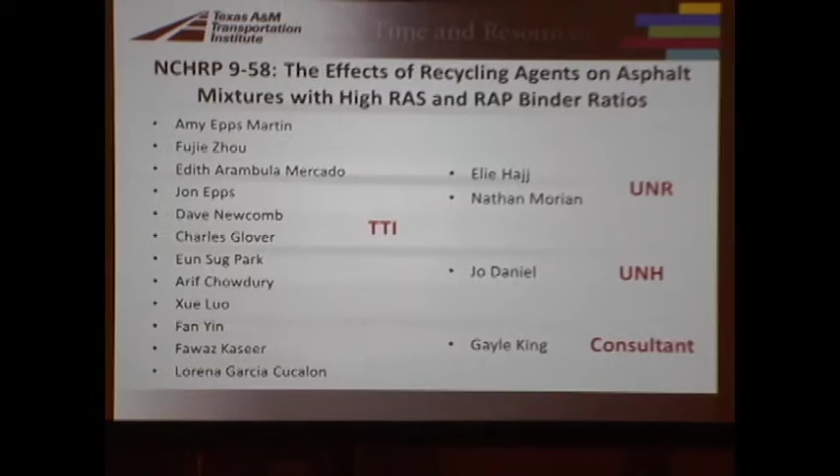The presentation today is just a small part of a big national project we're working on. It's an NCHRP project about the effects of recycling agents on asphalt mixtures with high RAS and RAP binder ratios. There's a lot of people working on this project, and I just try to herd the cats a little bit. It's a great team. Some members are in the audience, and I appreciate everybody's input.

As we all know, the motivation for increasing the recycled binder ratio, or RBR, is both economic, because we don't have to use as much virgin materials, environmental, because we're recycling materials, and there are some engineering benefits.

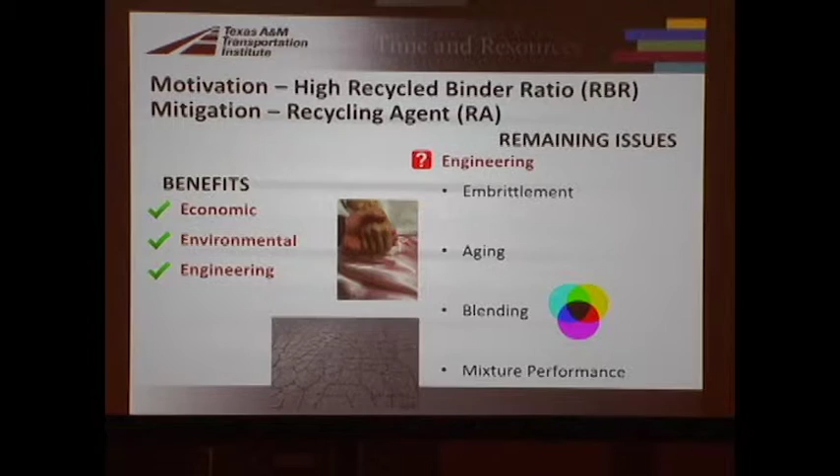But when we get those RBRs up too high, we have some issues, such as the material being too brittle, too stiff. We also don't really know what happens with these mixtures with respect to aging. There's also a big challenge in terms of the blending - what is the actual blending occurring between the virgin binder, the recycled binder from the RAP and the RAS, and if we add in any recycling agents? And then finally, the mixture performance, especially with respect to cracking - that's what we're worried about, because we have these stiff, brittle mixes with high RBRs.

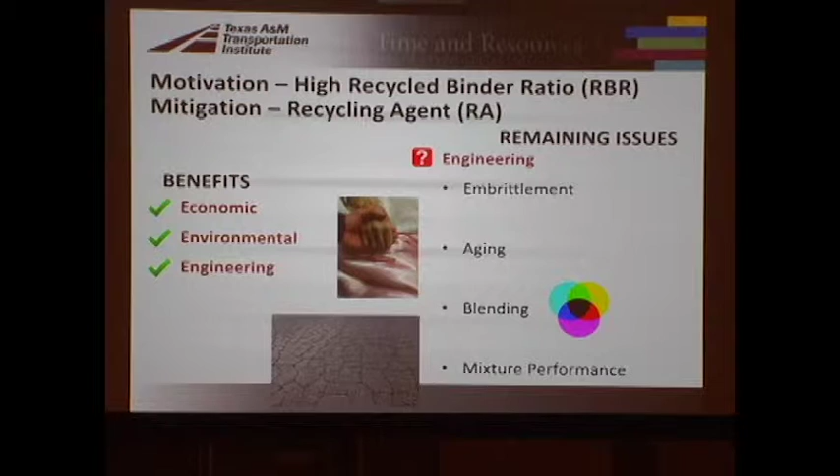So the idea is, let's try to use higher RAP and RAS contents, but use a recycling agent to mitigate those stiffening and embrittlement effects.

This is our latest field project that we just worked on with Wisconsin. Currently in Wisconsin, they're allowing a 0.22 RBR with all RAP, and they put down a mix with what we call the DOT control mix. We're trying to see, can we go up to 0.31 RBR by using a recycling agent? When we do that, our RAP aggregate goes from 26 to 34%.

Our virgin binder goes down from 4.3 to 3.7%. So the idea is, can we get those benefits that we want by using recycling agents to mitigate the effects of stiffening and embrittlement? And do those recycling agent effects last with aging? That's a big thing - maybe they work initially, but do they last with aging?

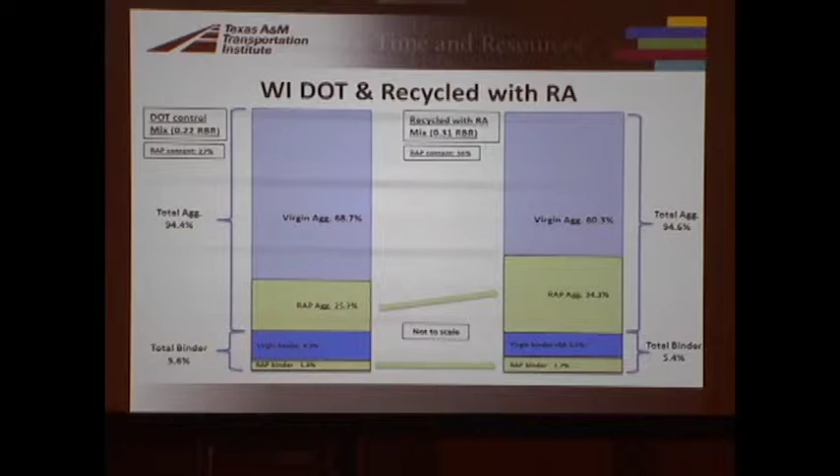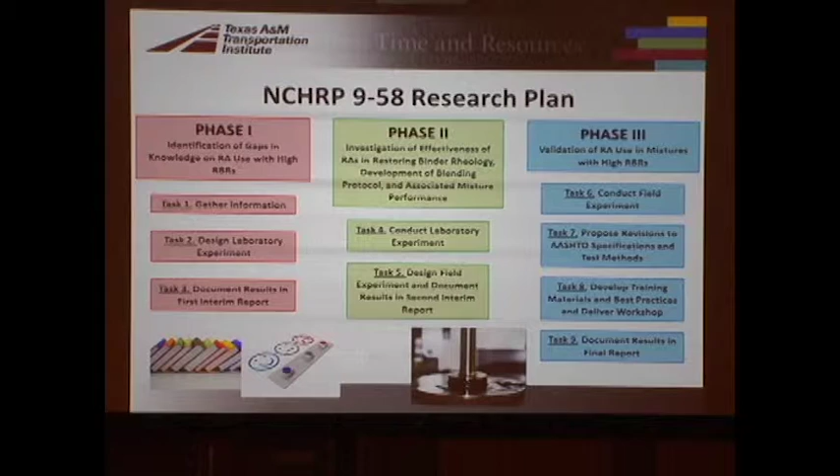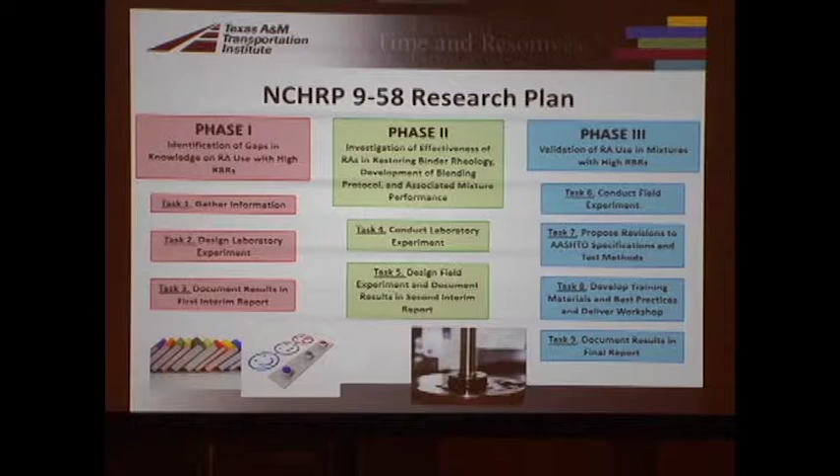To give a sense of where we are in this project, we're currently in phase 2. Phase 1 was a literature review and a survey of DOTs. Phase 2 is where we are right now - it's a big lab experiment, but all of our lab materials are tied to field projects. Then in phase 3, we're going to apply some of the tools we've come up with to lots of different material combinations in the different field projects. I'll speak about that at the end.

Some of the tests we're utilizing in phase 2 - we're doing quite a bit of binder testing, then a little bit of mortar testing. Mortar testing is a way to not have to extract and recover the binder out of the RAP and the RAS, so you're getting a more realistic blend of materials. For both the binder and mortar testing, we're doing the PG grading using the DSR and the BBR like we normally would.

We're using a parameter that's gained a lot of attention recently called delta Tc. That's the temperature where the stiffness criteria in the BBR is met, minus the temperature where the M-value threshold is met. It's a good indication of embrittlement. You want to use base binders with recycled materials that are S-controlled, so you want a positive delta Tc, but lots of binders we use are M-controlled, so their delta Tcs would be negative values.

We're also frequently using another parameter that's gained recent attention called the Glover-Rowe parameter. It's just a different combination of G star and phase angle - instead of G star over sine delta or G star times sine delta, it's G star times the cosine of delta squared, divided by sine delta. So it's just a different combination of G star and delta that you get out of the DSR. However, it's an intermediate temperature property - it's at 15°C, at a set frequency of 0.005 radians per second.

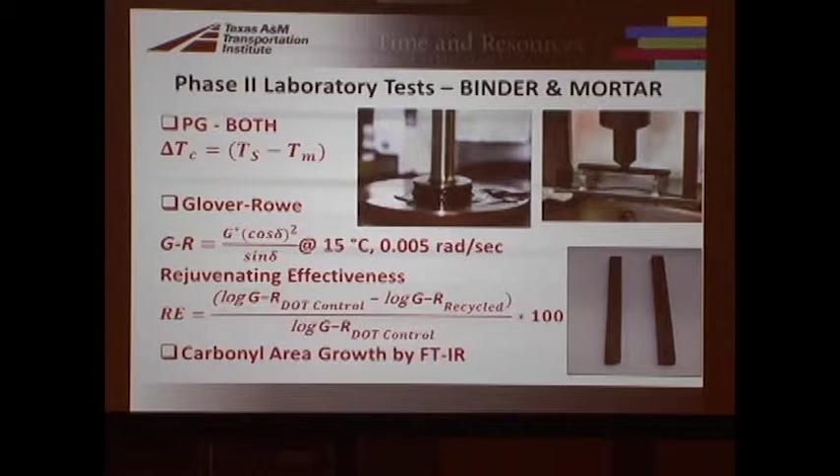We're also, in addition to rheology parameters, looking at chemical parameters, such as oxidation measured according to carbonyl growth by FTIR.

We're also doing mixture tests, so we're doing binder, mortar, and mixture tests. For mixture, we're looking at stiffness in terms of resilient modulus at 25C, because it's easy, cheap, and repeatable. On the same specimens, we're able to run the semicircular bend test and get something called the flexibility index, so we're able to get an intermediate temperature cracking resistance of the mixture.

We're also doing fatigue life by the simplified viscoelastic continuum damage test, and we're also doing the resistance index by the UTSST test. That's an improved TSRST test, which was the thermal stress restrained specimen test. It just has more analysis, and it measures the strain in the specimen that's not restrained also, an unrestrained specimen. So it's just an improved thermal cracking resistance test. We have 2 cracking resistance tests at intermediate temperatures and 1 at low temperatures.

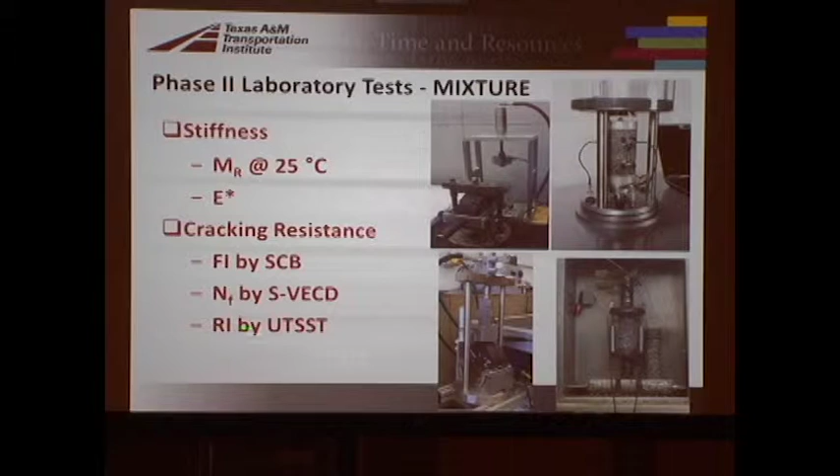So the initial phase 2, before we went to the panel meeting, we looked at a field project constructed in Texas in 2014, where we were lucky that as this project was starting, there was a Texas project being utilized on a TxDOT research project, and it used a 64-22. The target binder was a 70-22, but when they add in RAP and RAS, a lot of times, by the TxDOT specifications, you do a substitute binder and you lower the high temperature grade.

So we have a PG 64-22. We have 0.1 RAP binder ratio and 0.18 RAS binder ratio, and it was manufactured waste type of asphalt shingles. That's important to note, and really we shouldn't combine this and say it's 0.3 RBR. It's really important how much of that is RAP and how much of it is RAS, so we always show both now. We also added in a tall oil, which is kind of the new greener type of recycling agent.

In addition to that, we wanted to expand that for our big laboratory study, so we wanted to look at higher RBRs. We were charged with looking at 0.3 to 0.5 in this project. So we looked at 0.4 RBR with only RAP, and then we decided to look at 0.5 RBR, where we had 0.25 from RAP and 0.25 from RAS. We also looked at tear-off asphalt shingles, as those are more prevalent and much more aged than the manufactured waste shingles.

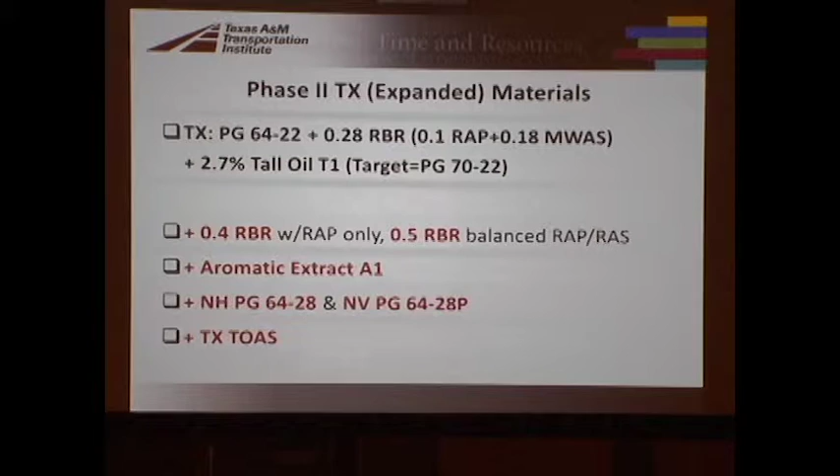We also wanted to look at a second recycling agent, so we looked at one of the older, more traditional types, an aromatic extract that we call A1. We also looked at 2 different binders: a very high quality binder from New Hampshire, unmodified, but a 64-28, which has a very good positive delta TC value compared to the PG 64-22 delta TC value. We also wanted to look at a polymer modified binder, so we looked at a Nevada binder used in another field project associated with 9-58. And I mentioned we're looking at TOAS too, tear-off asphalt shingles.

I don't have time today to talk about everything we're doing in this project, but one thing that might be of interest: to start the whole project, we have to figure out an optimum recycling agent dosage to use in the mixtures, because we cannot test all those mixture properties on multiple recycling agent dosages. So we've been working with the binders, which assumes complete blending, which isn't exactly the realistic scenario in the mixtures, but I'll speak a little about that toward the end.

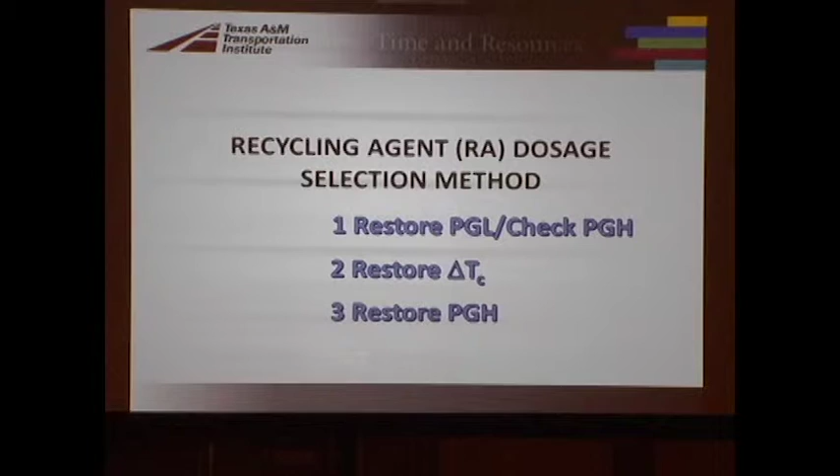So we came up with a preliminary recycling agent dosage selection method, this trial number 1, the first approach we came up with in phase 2. Then in phase 2B, which I'm going to describe in a minute, with some more materials, we came up with these second 2 approaches, and we think we finally nailed it down. So I think this is hopefully of interest.

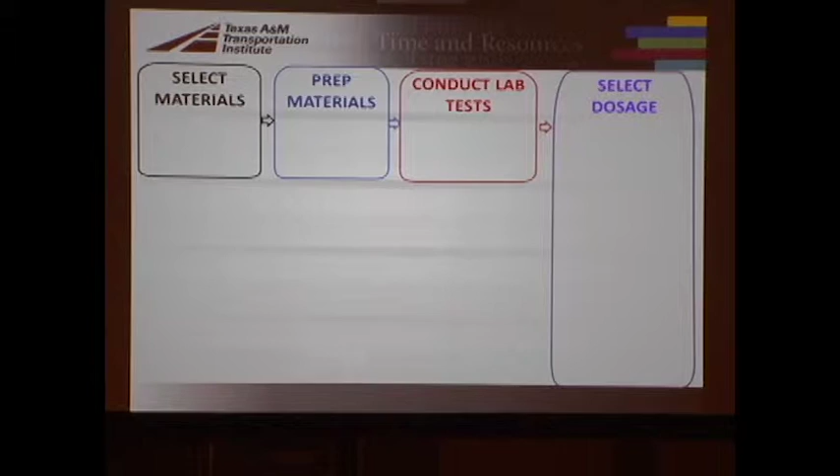So the first one, actually all 3 of them have these steps: select the materials, prep the materials, conduct the laboratory tests, and then those 3 different approaches differ in how we actually select the dosage. All of them have this step: selecting the materials, selecting the target grade, which sometimes can have a bump up due to traffic, and then the base binder grade that might have a bump down due to the use of recycled materials, a substitute binder.

Select your RAP and your RAS sources. We're definitely finding that Texas RAP is way different than New Hampshire RAP in terms of the aging of the materials. Pick your recycling agent. There's lots of different types. Right now I think we've looked at 6 different types, large categories of types, not just different brands.

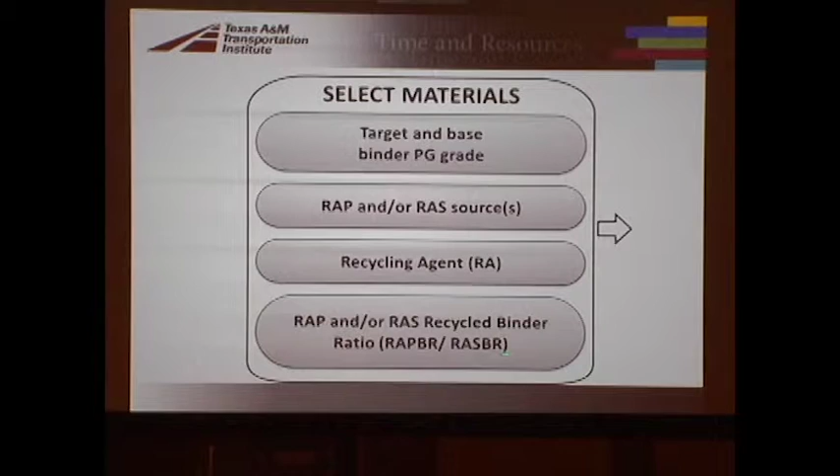And then you got to pick what's your RAP binder ratio and your RAS binder ratio. This is the hard part, extracting and recovering the RAP and the RAS binders. Nobody wants to do that, including my undergrad students. But it's pretty necessary. We're looking into some of the equipment that's coming online that could make it safer and faster and easier. We don't know, we're going to try it out maybe. But you got to get that binder out so that you can add it to the virgin binder and the recycling agents.

So we usually do 3: with no recycling agent, that would be 0% dosage or the control. With a low recycling agent dosage, maybe around 2%, that's kind of in terms of how the manufacturers of the recycling agents recommend what you do. 2% or less, you basically just add it in there. 2 to maybe 5%, you basically take out some virgin binder and replace it with recycling agent. So there's this addition versus replacement in terms of how you add the recycling agent.

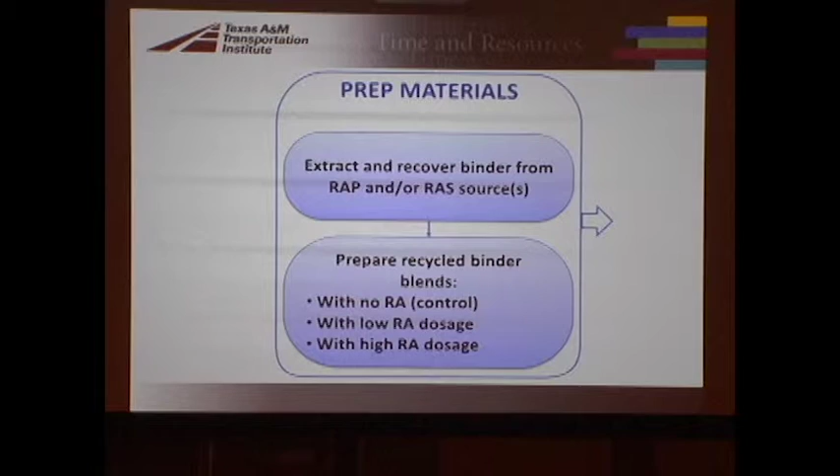So we look at 2% because we thought that was a pretty low dosage, and then we look at 10% because we thought that was pretty high. Well, we thought that was pretty high until we started looking at the material combinations that we used. But even so, we do have to extrapolate a little beyond 10%, but we still feel pretty good about it.

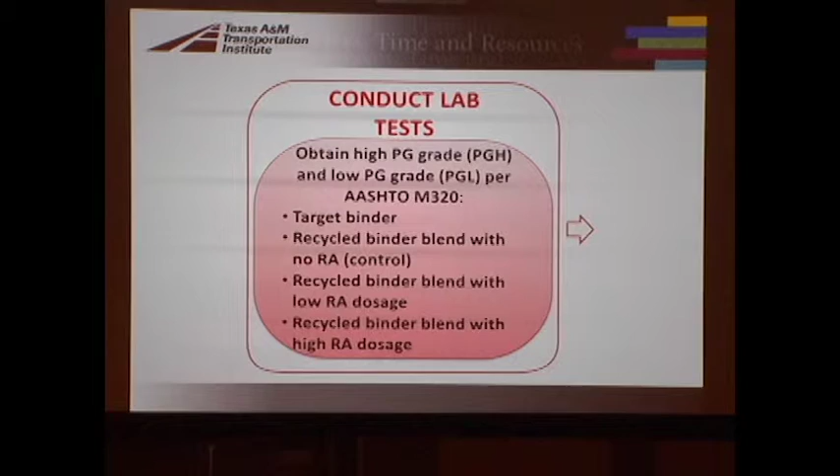Okay, then you got to grade it. So you get the PG high temperature grade, or PGH, and the PG low temperature grade just by AASHTO M320, just like we always do. We do that for the target binder, for the control binder with no recycling agent, and then for the 2 ones with a low and high dosage. And then when you plot these, we basically plot the PG high temperature grade versus the dosage.

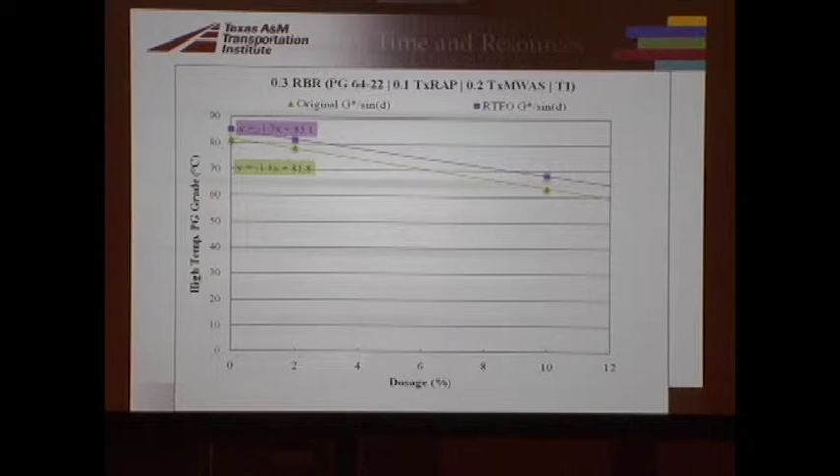We're going to have 3 points: 0%, 2%, and 10%. The green line is the original G-star over sine delta. What was its PG high temperature grade at the threshold? And then the purple is the rolling thin film, because you gotta figure out what both of those are and what's the limiting one.

And then on the right side, we're gonna graph 2 more lines, and we're gonna put the low temperature grade. Here we have the M controlled in blue and the S controlled in gray. What you see here is the distance between these 2 lines is actually the delta TC value. And as we keep adding recycling agent, the distance between those 2 lines is coming together, which is good.

So the way that the first trial of restoring the PG low temperature grade works, what we do is we come along here. So this is controlled by M control, right? The M value is saying it's a minus 15, and the S value is saying it's a minus 26. So it's M controlled when we're over here at 0% dosage.

So we keep adding in dosage along a linear relationship, and everything that we've tested seems to be linear. So we're using a linear relationship, and we feel fine about that. I don't know what would happen if you added 25%, but you're not going to add 25%, so it's okay.

So at these dosage levels, we add it in until we get to a minus 22, okay? Because we started off at a minus 15 or so, we got to add in recycling agent until we get to a minus 22, because our target is 70 minus 22. That's what we're trying to get to, like if we just had virgin binder.

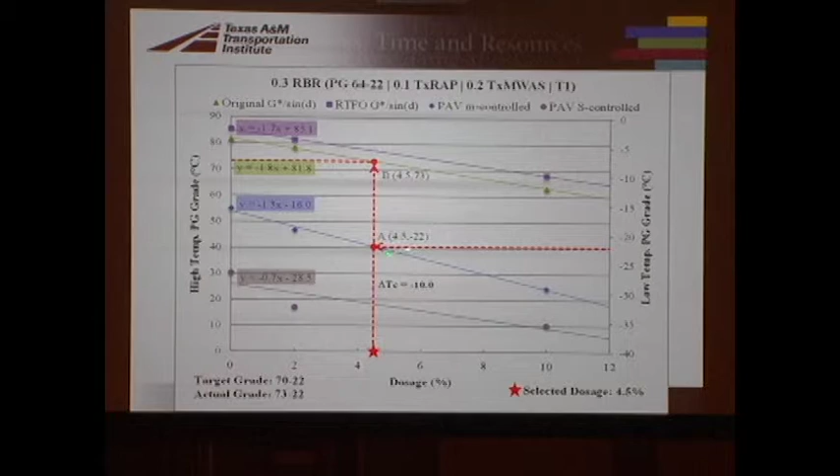So when we get to minus 22, we have a dosage of 4.5%. That sounds reasonable, and we look at what our delta TC value is: minus 10. Then at the next step, since we restore the PG low temperature grade to minus 22, we come up here and just check what is the high temperature grade at that point. So the high temperature grade at the same dosage of 4.5% is 73. So we're at 73 minus 22, which hits the target of 70 minus 22, and we're done.

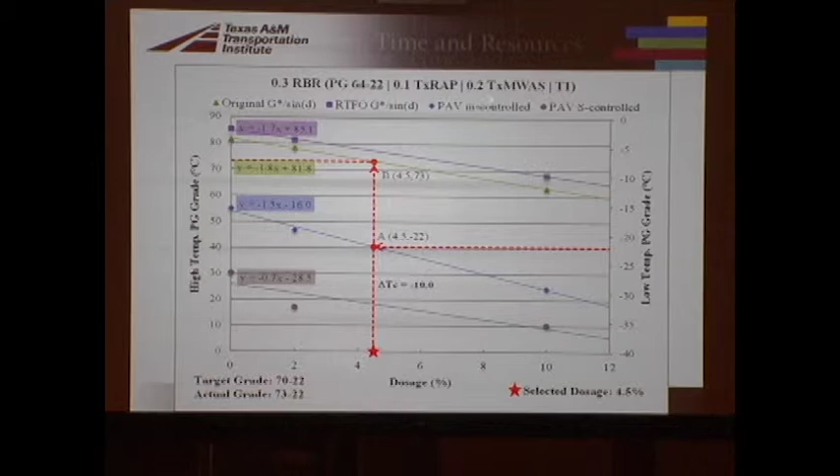Okay, so this is for a particular blend, of course, with a particular mix of RAP and manufactured waste shingles, with a particular base binder and a particular recycling agent. So that's what we just went through in that example, what I just said.

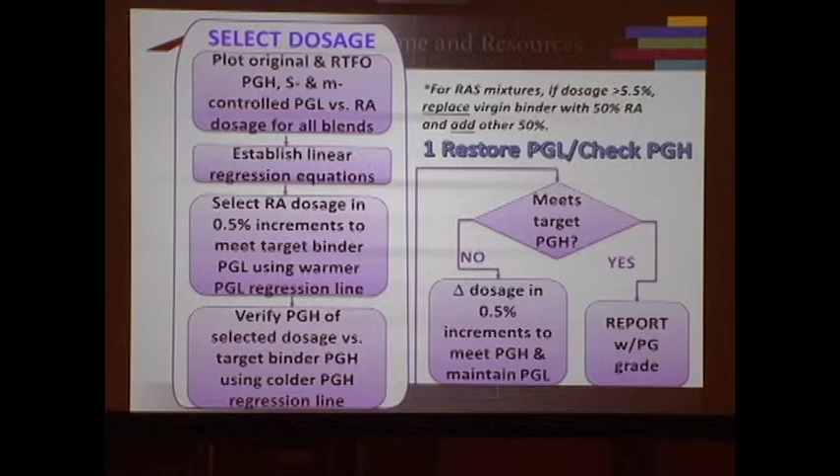So you're using the warmer low temperature grade, which was M controlled, and then you're verifying it using the colder high temperature grade, which was the original binder, not the rolling thin film. That's the first approach that we tried, and we note the PG, or note the delta TC.

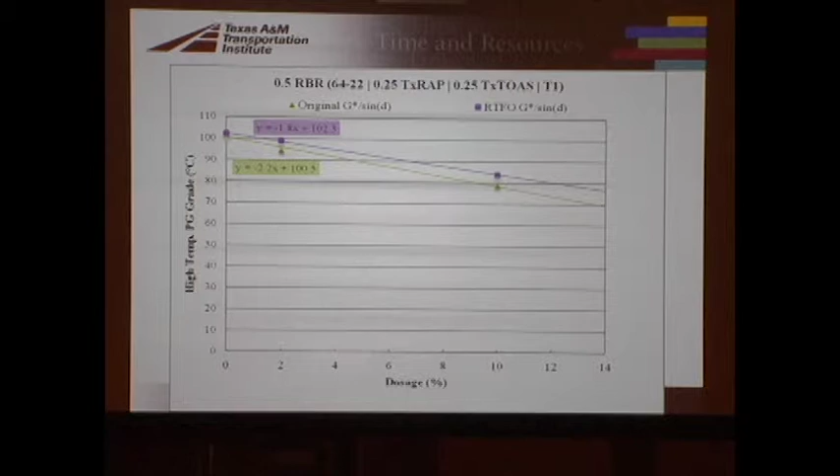Now what if we try it at one of those high RBRs, 0.5 RBR with a really high RAS content, 0.25 RAS content. So we get all four of our lines. You see the crazy M value line, but you do see that it's closing in to the S value line. The delta TC is getting smaller.

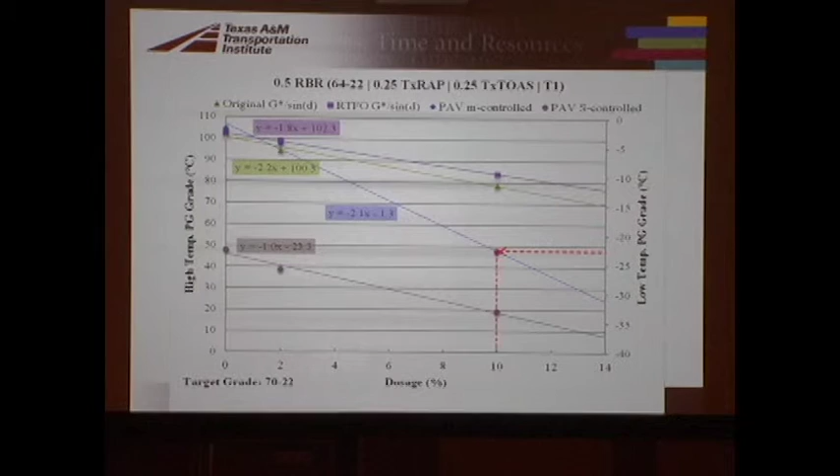So the first thing we do is we come along this very steep blue line and we restore to a minus 22. Once we get to a minus 22, that's at a dosage of 10%, and a delta TC of minus 11, which seems high. Then we check the high temperature grade, and at that point it's a 78. That's not a 70 minus 22, right? That's a 76. So we would do a second step where we'd continue down this line, adding in recycling agent until we bring it down such that it's a 70.

We need to get this number in half, I forgot to mention that, in 0.5% increments. So as a practicality measure, we're doing this in 0.5% increments. We add it in until we at least get below a 76. In this case, we get a 74.

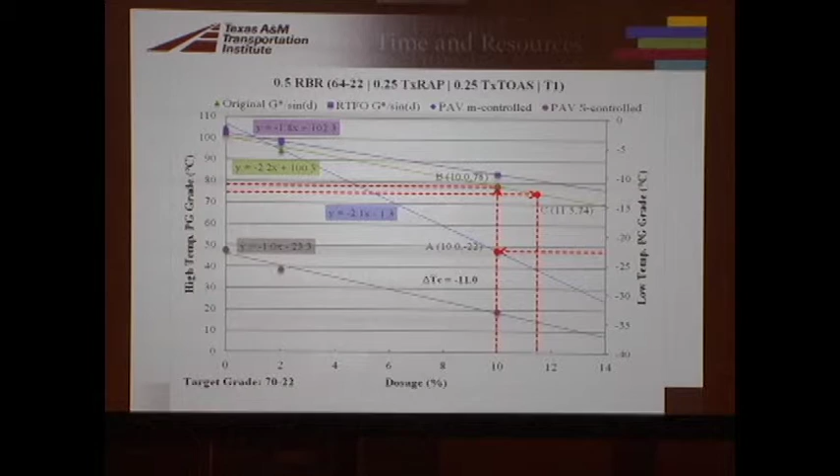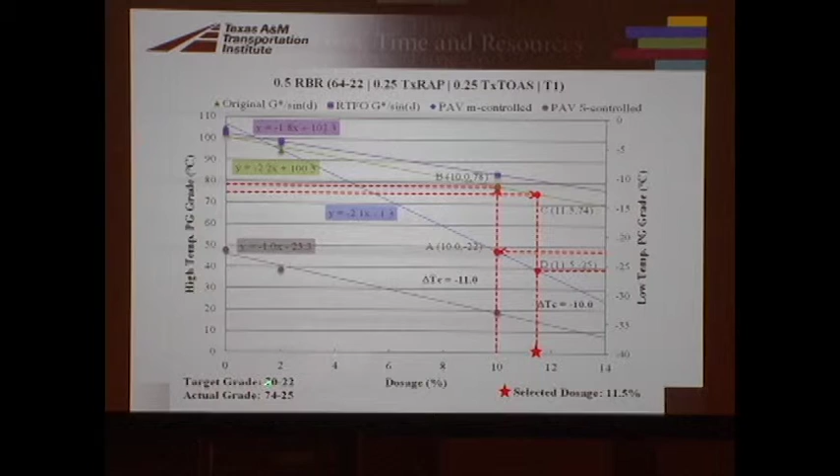And then we just double check. We're at a minus 25, which is still a minus 22 grade. So we get a 74 minus 25 with our new dosage of 11.5%. That meets the target, and it also reduces the delta TC to minus 10.

Now what is the value of this delta TC thing? The delta TC has been shown to be tied to some age-related cracking at airports, and some people have suggested a value of minus 5 is sort of the threshold, you don't want to get more negative than minus 5 after 40 hours of PAV aging. Of course, this is after 20 hours of PAV aging. So 40 hours of PAV aging, it's like, forget that.

That's just way too high in terms of a dosage. And we also don't know really if that minus 5 is the right threshold or not. So for right now, we're just kind of keeping track of those delta TC values.

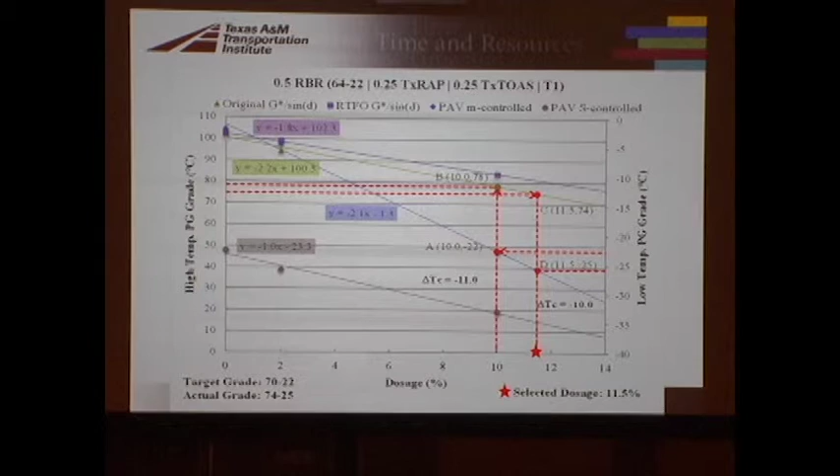Okay, so if you look at trial approach 1, this is a bunch of data, including the one I just showed you. So I just showed you this 11.5, and I just showed you this 4.5, with a delta TC of minus 10. I think I showed you that one. It says a delta TC of minus 9, but anyway.

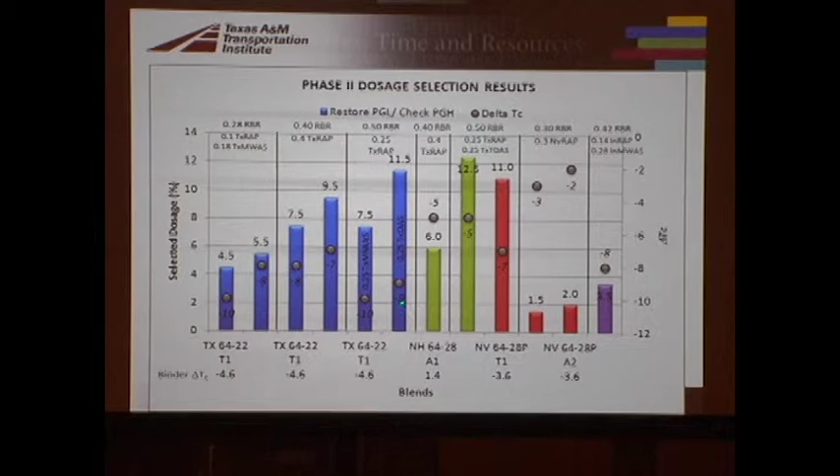So what you see here is the blue values are the Texas 64 minus 22 base binder that's used in the field project, T1. You see the delta TC of that base binder is pretty negative, it's negative 4.6. Remember, we want it to be positive. The New Hampshire binder is in green. It has a much better delta TC to start with, so it has room for those recycled materials.

Then we have the red, which is the Nevada 64 minus 28 polymer modified binder. From this line over to the left, this is all with Texas recycled materials. These two short ones over here are with Nevada RAP only, so no RAS and much less aged RAP. So what you see is, number one, it's a little bit better quality in terms of the base binder, but the recycled materials are just not nearly as stiff.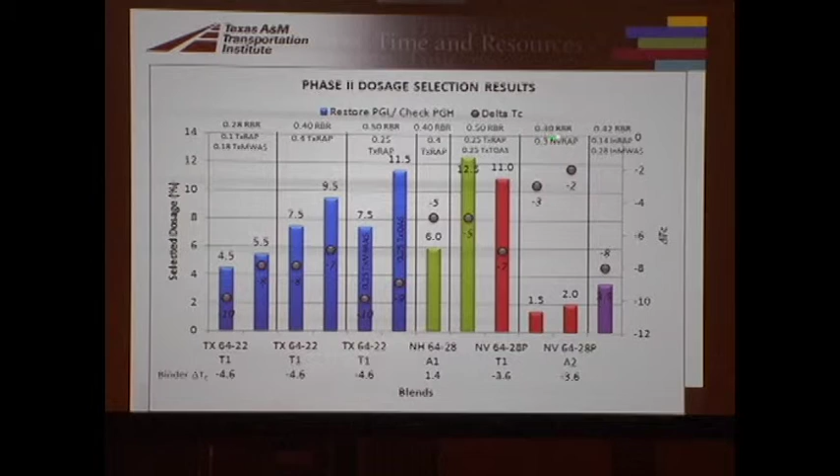This is also mixing and matching. This is a 0.3 RAP only. This one is a 0.3, but with RAS added in. This is a 0.4 RAP only. This is that 0.5 high mixed. This is a 0.4 RAP only. So it's kind of a mix.

You don't need to look at all the detail here, but suffice to say we definitely can see the difference, and this is an aromatic extract. This is A1, I'm sorry it's not labeled. But you can see that for A1, in both of these cases, A1 needs a little bit higher dosage. Who cares, that's just a matter of how the materials are acting together. But the A1s need a little bit higher dosage. We definitely see a difference.

This is the manufactured waste shingles. This is the tear-off shingles, everything else being the same. So you can see that a higher dosage is needed with tear-off shingles. You can also see the effects of these different base binders.

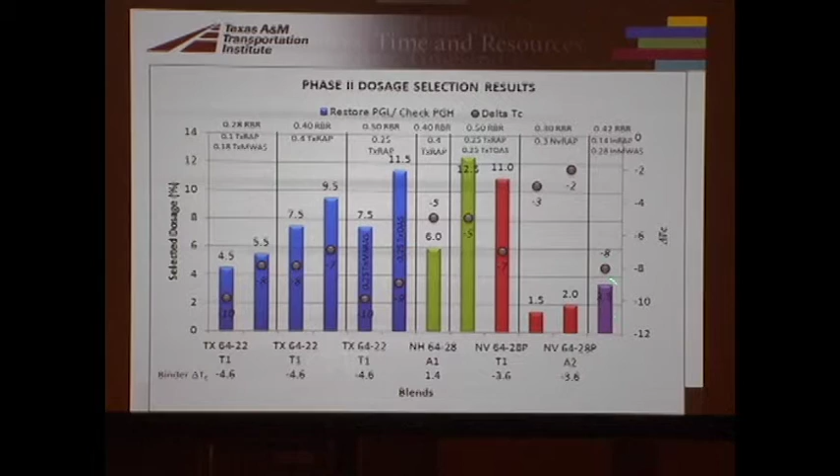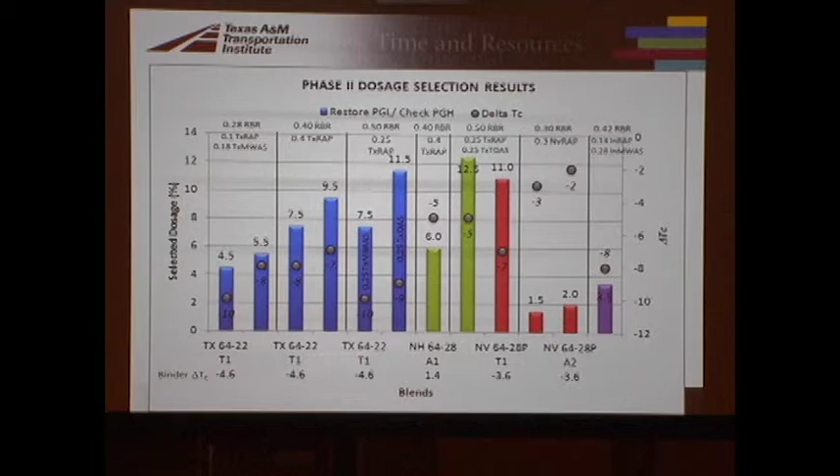And this final one over here is not labeled, but it's in Indiana, with Indiana binder, Indiana recycled materials, and a recycling agent that we used in the Indiana field project. So it's just another data point. But all of these are by that first trial approach.

So that's what we think was the optimum recycling agent dosage. We also wanted to look at how the rejuvenating effectiveness changes with aging.

This is the DOT control binder and the black space parameter: log of G star at 15C and 0.005 radians per second versus phase angle at 15C and 0.005 radians per second. This shows stiffening or softening, and this shows flexibility or embrittlement, capturing both rheological parameters on a single plot.

What you see here is the rolling thin film oven of the DOT control binder, then PAV 20 hours and PAV 40 hours. So a single binder marches across this diagram from the lower right corner to the upper left corner.

Oh my gosh, I don't have any time. Okay, I'm going to have to go faster. You'll see, look what happens.

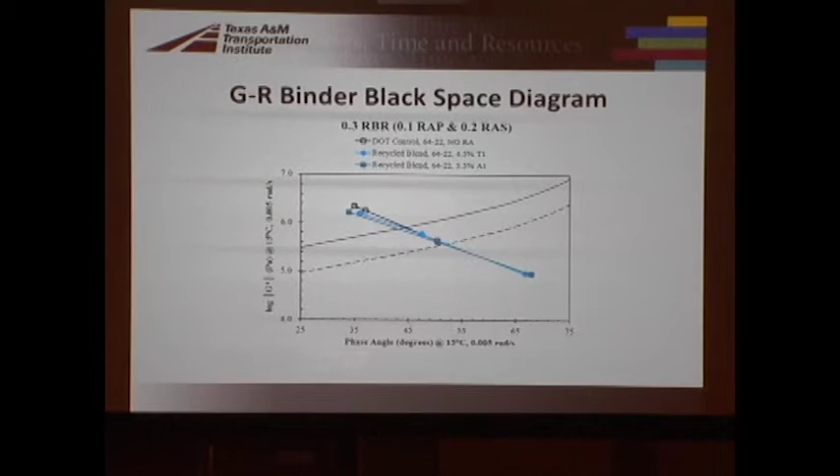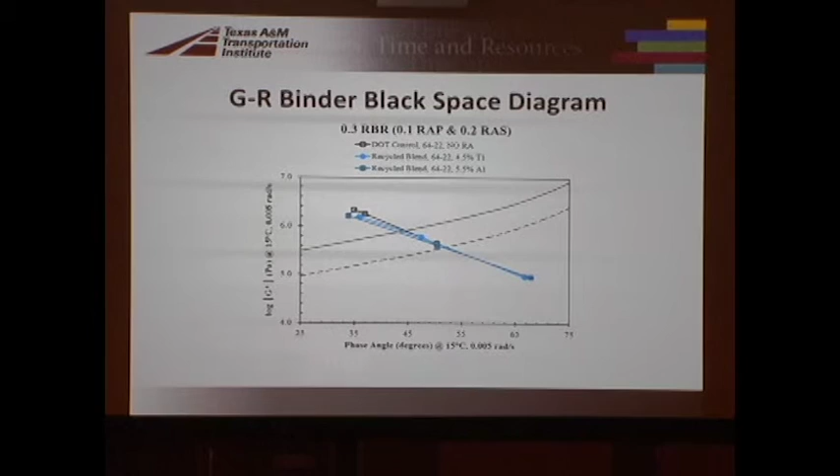When we put the recycling agents in there, it goes back down and toward the right - that's good, that's what we want. But what happens with aging is that it's still out here past these cracking thresholds. These are very loosely based on those airport pavements, but still there's some kind of threshold. So it's not good with aging.

We're going to have to skip ahead. That's basically what these are showing - the binder rejuvenating effectiveness is lost with aging.

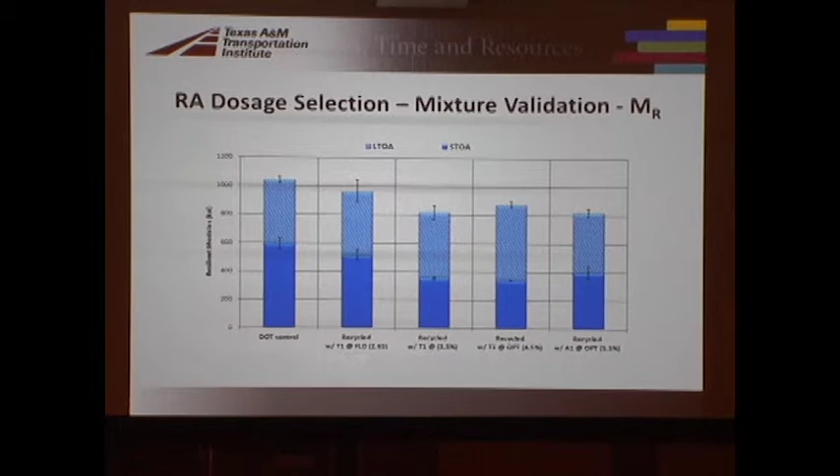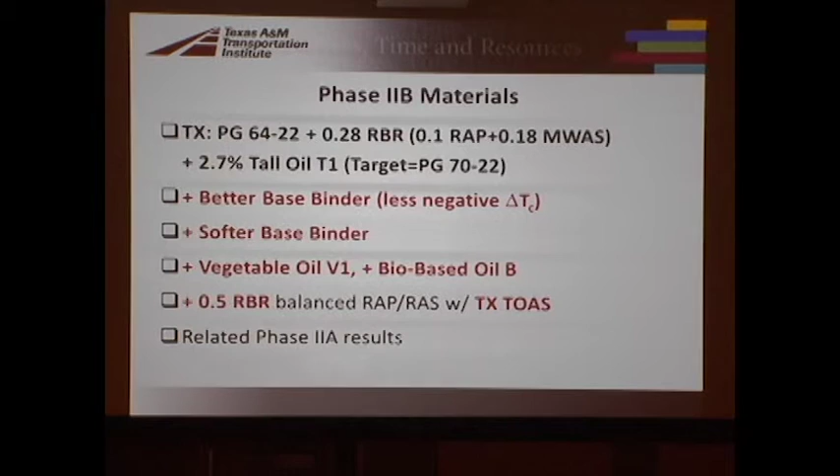We did some mixture validation with both the cracking at intermediate temperatures and stiffness at intermediate temperatures. Then we went to a phase 2B where we added in 2 additional recycling agents. We also added a better base binder from Indiana and a softer base binder, so we're just adding in more combinations.

We said, you know what, we better check the rutting resistance once we get to that lower right-hand corner of the black space diagram. So we're doing some of this - I can't go into the detail of that today, but we are doing that.

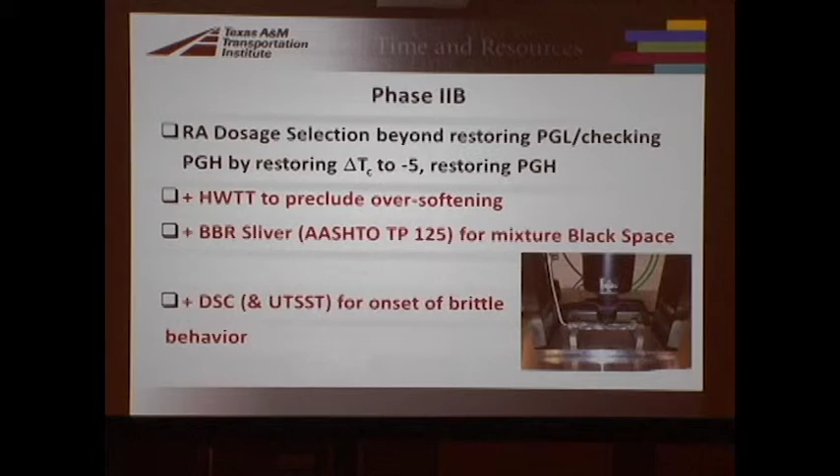So the second trial approach was to try to restore the delta Tc to that -5 threshold number. When we do that, you see that's the top of these - it goes from 4.5 to 12.5. So the example I showed you, you've got to really increase the dosage.

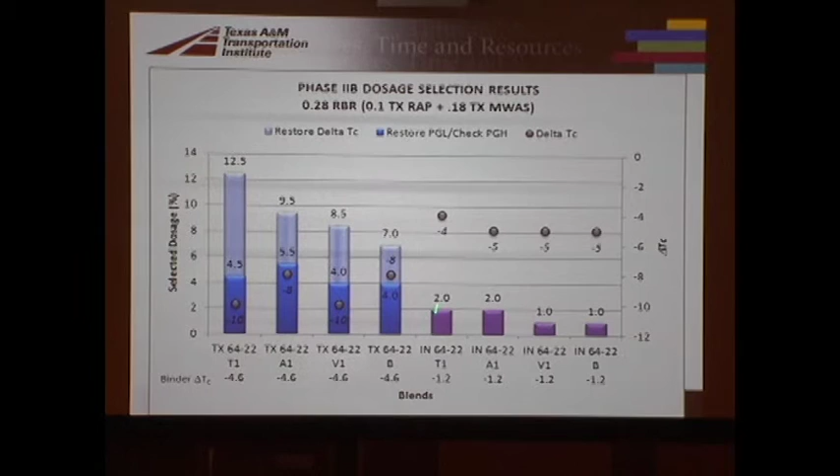When you do that with the Indiana blends, this is the better base binder with a delta Tc of -1.2. The better base binder is already at -5 for delta Tc - you see how there's no additional stacked element here. So the Indiana would have the same number whether we did it by trial approach 1 or trial approach 2.

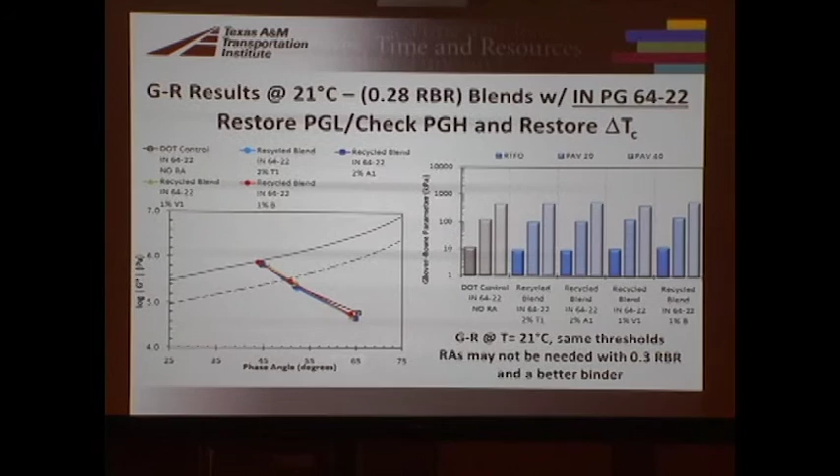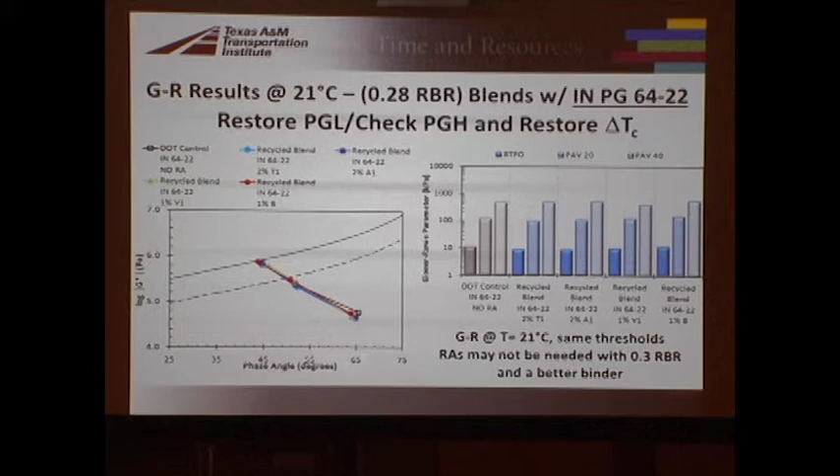But what we saw, and we changed the parameters for this black space to 21C, which is more applicable for a 64-22, so everything is kind of shifted already. The Indianas, it doesn't make a difference - at those low recycling agent dosages, it doesn't make a difference.

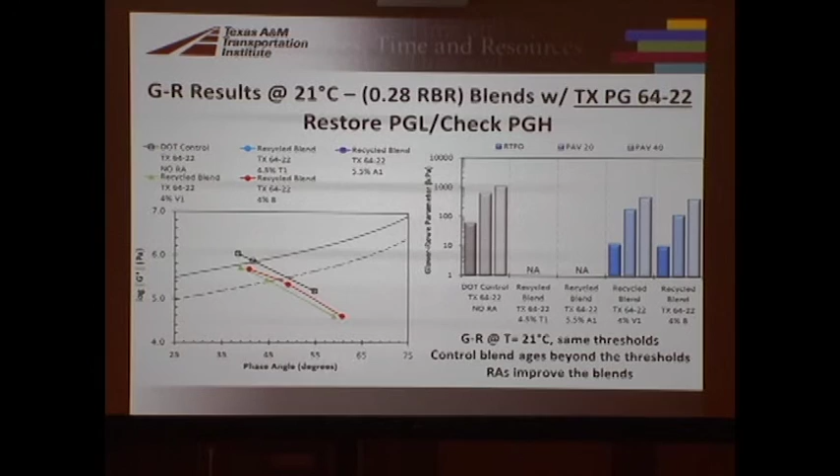With the Texas, though, we do see that this is the initial values at 21C, so everything just kind of moves down and to the right. But when we up those dosages to 12.5, oh my goodness, we're way down here, and we're probably over-softening.

So we check that - yes, Hamburg rutting. Okay, so we can't do that. So we've got to balance that.

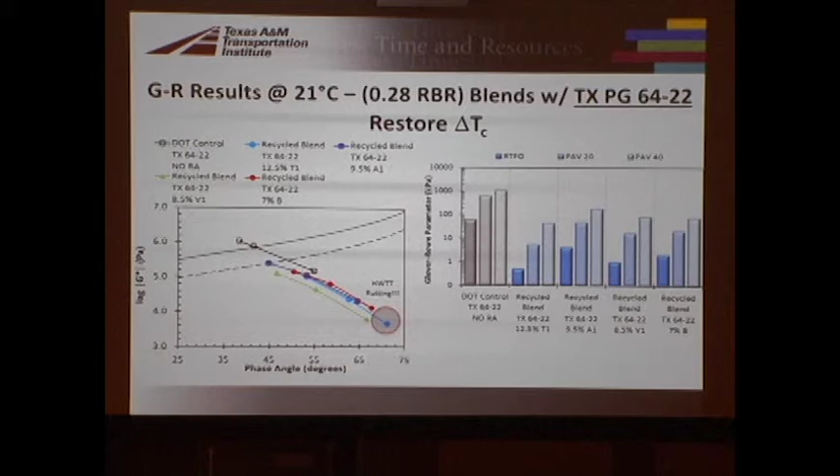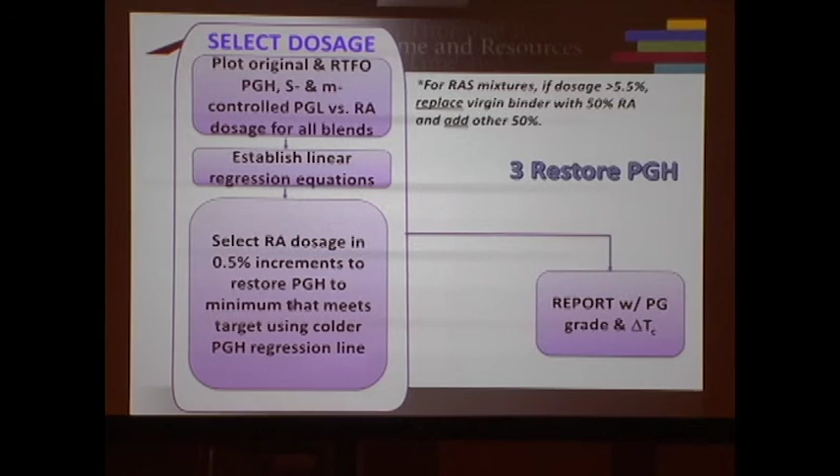So we did a third trial approach - I'm not going to go through this in detail - where now it's kind of like in mix design: we're going to put as much binder in there for durability and cracking resistance, but not have a rutting problem. So that's kind of what we're thinking.

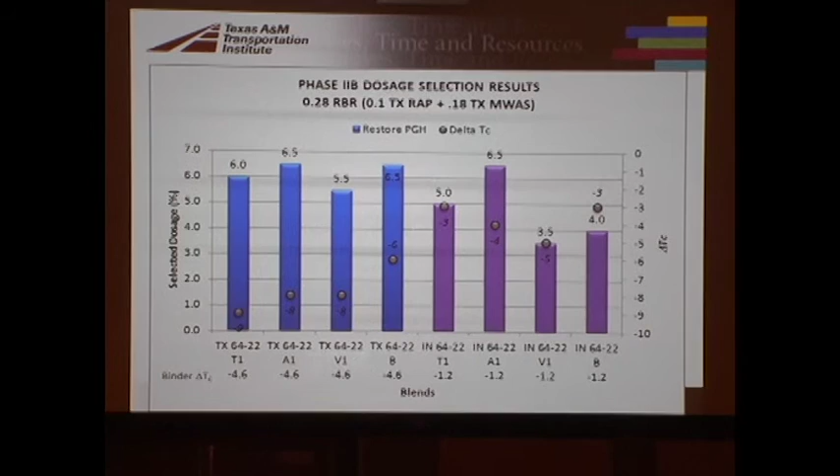So we're going to restore the high temperature grade. When we restore the high temperature grade, we get a dosage that's between that 4.5 and 12.5, right? So that's kind of where we want to be. And when we do that, it looks like this in black space.

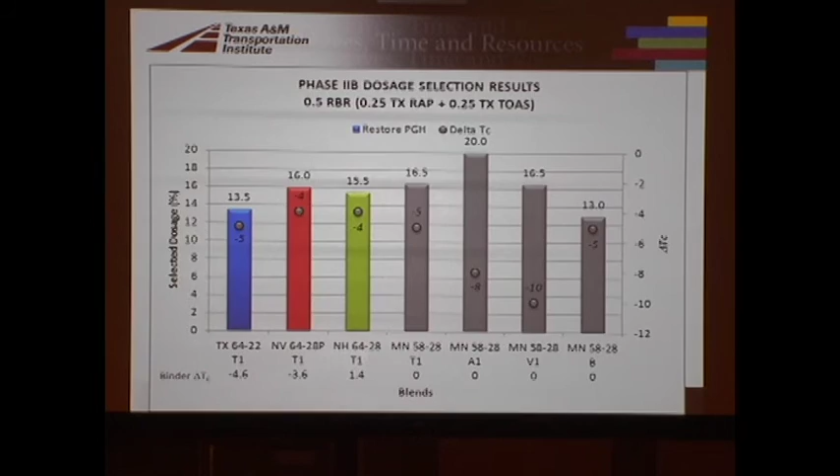It's not nearly as over-softened as it was before. And we did check it in Hamburg. In Hamburg, we really couldn't separate out moisture and rutting effects, so we did a dry Hamburg, and in dry Hamburg, it passes. So we think this might be the right approach - restore the PG high temperature grade.

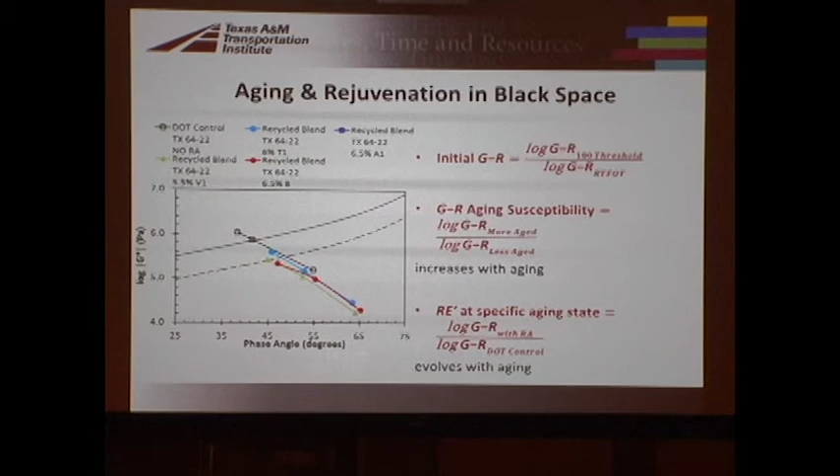We're also looking at a few other parameters in black space, so how things age in this direction and how they get rejuvenated in this direction. That's what we're trying to do - we're trying to finalize this and match the binder and the mixture, then go ahead and characterize the mixtures at this selected optimum and look at cracking resistance and embrittlement.

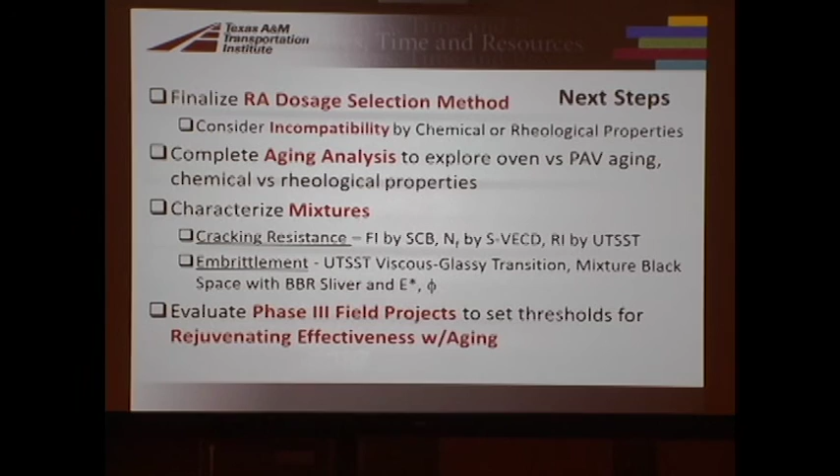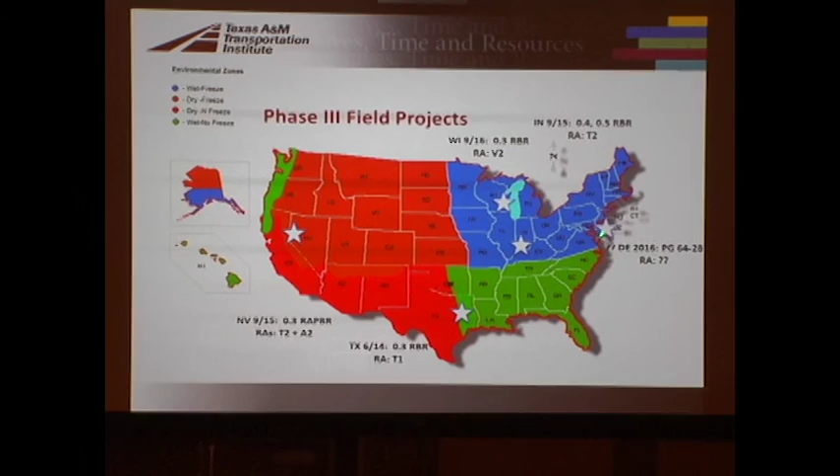This is my last slide. We also have different combinations of materials for phase 3, different combinations in Nevada, Wisconsin, Indiana, hopefully Delaware, and Texas. So this is a pretty big effort, and I hope that I at least hit the high points. I'm sorry I had a little too much to say.